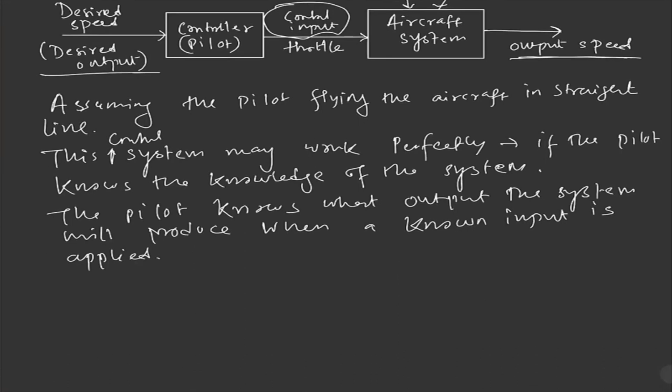But if there are some uncertainties or disturbance coming to the system, or some kind of unmodeled dynamics, the desired speed cannot be maintained because the pilot does not have any knowledge of the actual speed of the aircraft. So in this case, we can't achieve the desired speed if there is some disturbance or uncertainty. But the pilot can achieve the desired speed if the pilot knows the exact model of the system.

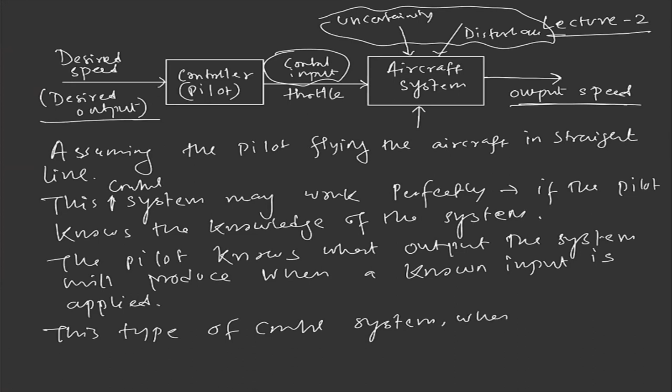But due to this kind of input to the aircraft system, uncertain disturbance, we can't achieve the desired speed. Again, if you have some wind acting opposite to the flight motion, it will give some disturbance to the system. So we can't get our objective. And this kind of control system, where the pilot does not have the knowledge of the system response, is the open loop control system.

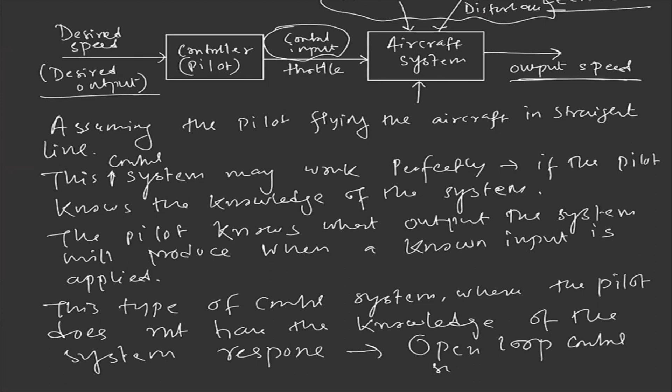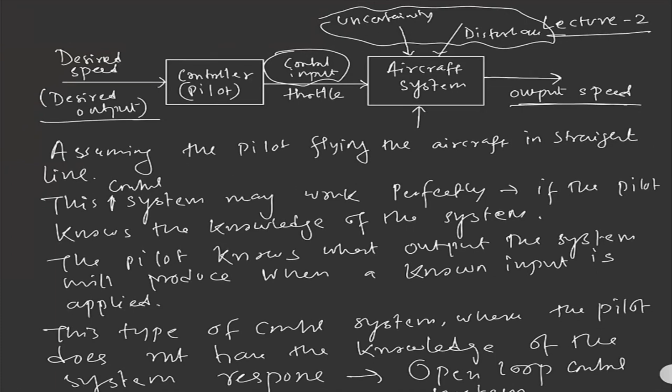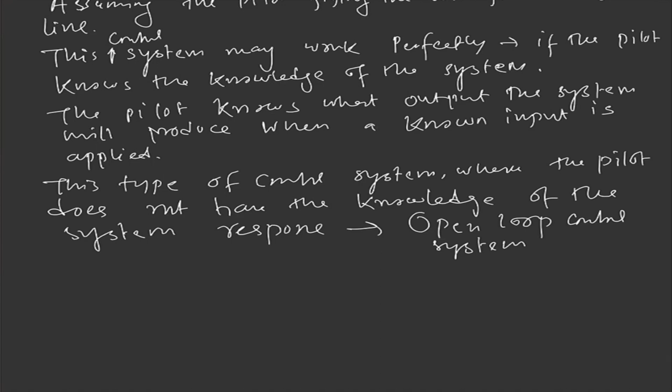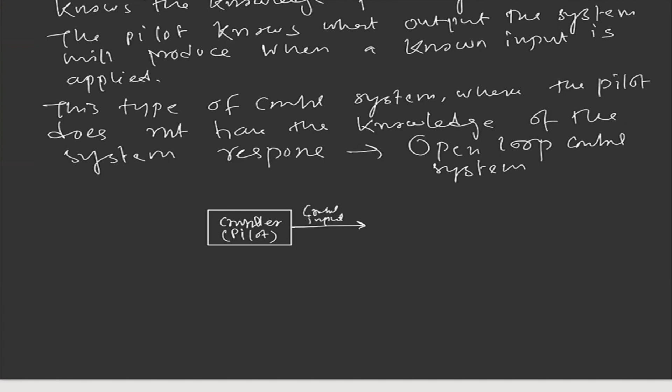So based on whatever input we are applying to the aircraft, we will get some output, but there is no means to correct that output, because there is no feedback in the system. This kind of system we call open loop control system. Now, the pilot decided to verify the actual speed of the aircraft. So let's draw the figure again. We have a controller here, called pilot, who is giving some control input to the plant, and we are getting the output speed.

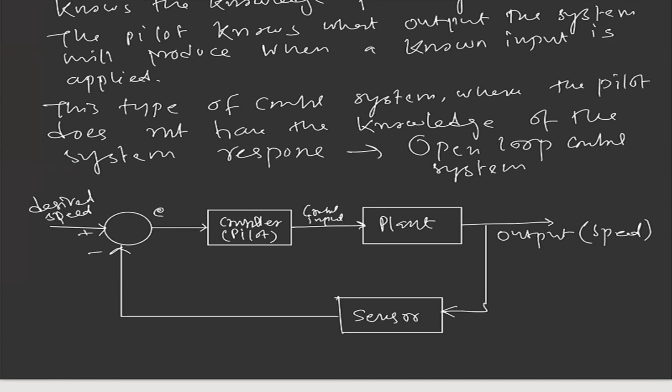Let's assume some sensor, and the sensor can get the actual output of the aircraft system. And if you have some summing point here, some kind of mechanism, this is my desired speed. This is the error, negative and positive. And this is the actual speed. If I denote this as yd, desired speed, and this as y actual, the error E will be yd minus y.

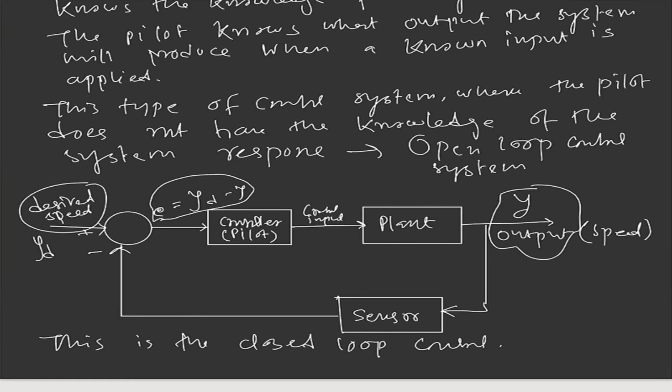So based on the error, the pilot can decide how far it is from the desired speed of the aircraft, and accordingly the pilot can control the input to the plant, and based on which we can modify the output response of the aircraft. This is basically the closed loop control system. Here this is the complete system, and we have different subsystems like controller, plant, sensor system.

The controller subsystem is the main design parameter in designing the control system and determines how rapidly and with what maximum overshoot and undershoot the actual output, which is y in this case, will become equal to the desired speed, desired output.

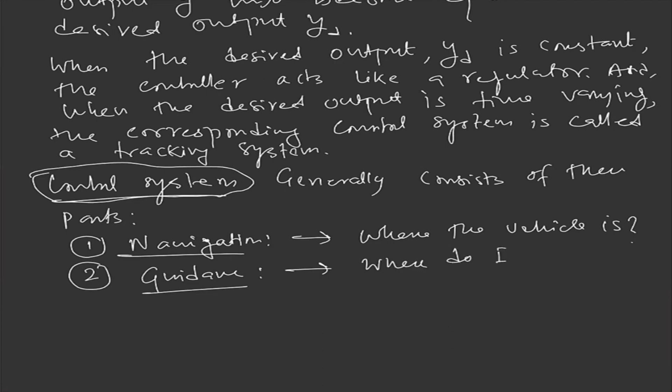And second is guidance. Guidance tells where do I want to be. So guidance generally measures how far you are from the desired value. From this error function, we can comment how far the actual output of the aircraft is from the desired output. So it generally measures the error, and based on the error it calculates. So this is how the guidance works.

And third is control. This is the most important part. So control is how do I get there. Based on the navigation and guidance, how far you are from the actual value, control will take the effective action so that you can achieve the mission. Based on the error, the controller will provide the command to the plant, and slowly we can come up with our desired value.

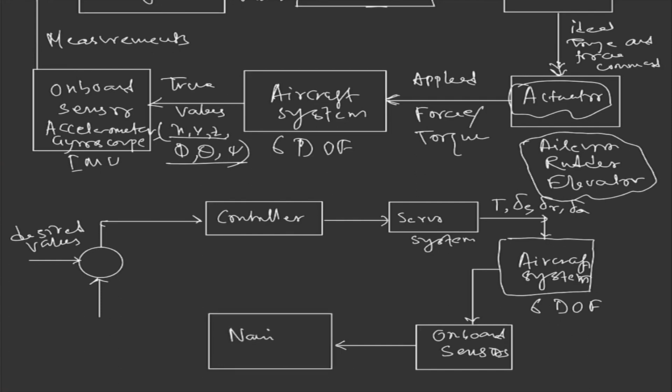And the actual outputs are sensed by onboard sensors, and the sensed output goes to the navigation block. So in navigation, basically we can come up with some filter techniques or some kind of designs where we can find the estimated values. And these estimated values go to the summing point, in a negative loop. Why it's negative and not positive, we'll be talking later. All this we'll be covering. So based on these estimated values, we can find the error.

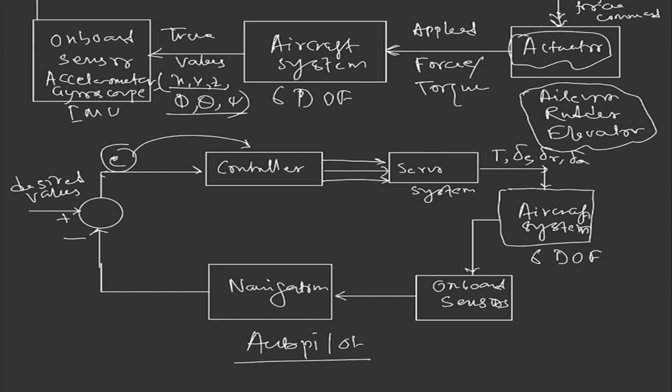And this error signal goes to the controller, and the controller can take the effective actions based on the control system. We provide the ideal values to the servo system. Servo system basically, you can assume the motor, what deflection we should have for providing the desired torque or force to the aircraft system. So this is how practically autopilot works. This is basically autopilot design. This can be for aircraft, for the rotational motion or translational motion, or any other motions. So this is how we achieve our missions.

Let's stop it here. We'll continue from the next lecture. We'll have some basics on systems, how we'll validate the system, whether it's linear or not, because most systems in this course will be considered linear, because we'll be designing linear controls for this aircraft. So our system should be converted into linear form, and we can apply the linear controls. So this is how we'll be moving.